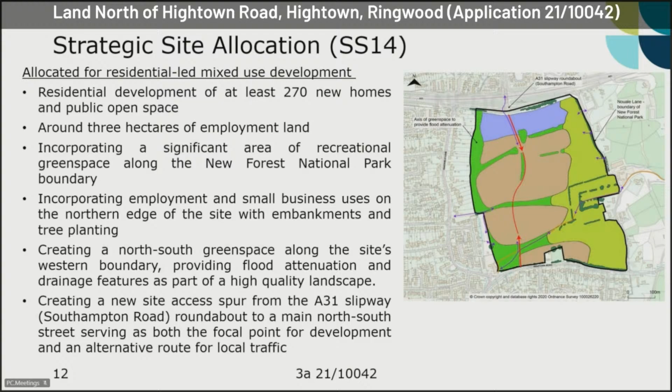So how does the application sit against that allocation? The plan on the right is the land use parameter plan, and I'll take you through the other parameter plans in a moment, but it sits on this slide quite helpfully alongside the allocation and the concept master plan. You can see the colours are broadly the same in terms of the employment being focused at the north of the site. The buff colour remains with the residential parcels, and the two shades of green pick up on the SANG on the eastern side adjacent to the national park, and the open space requirements down the western side, with the green corridors coming through the site and alongside the right-of-way down at the south as well.

The application's in outline, as I said, with just access for consideration, but it's accompanied by a suite of parameter plans which give you an idea of how the development will come forward, and certain parameters with regards to land use, where the accesses will be, movement strategy, scale of development across the site, and how it all integrates with the landscape. So we're looking to approve these parameter plans, and that will help guide future reserved matters applications and fix certain things.

Taking you through those, the first one is the land use plan. You saw that a moment ago when I had it alongside your allocation concept master plan. I'm just picking out some of the key features.

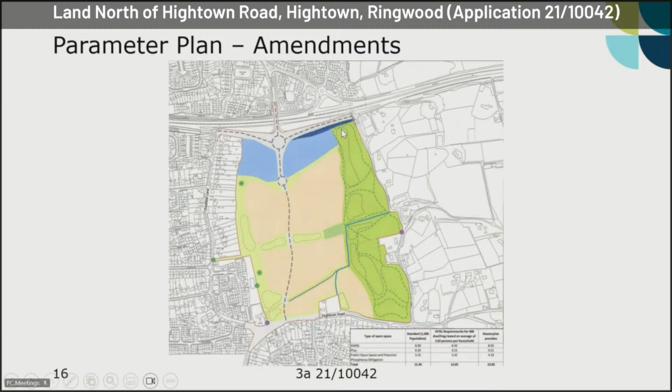Looking to the scale and building heights parameter plan, picking up on the residential parcels and the employment land. The blue is the employment land, which has buildings up to 12 metres high along the highway and at key locations - reasonably significant employment buildings, but as a gateway to the site and sitting on lower ground to the A31, there's a 6 metre difference between the A31 and down into the site at this location.

As you come into the residential parcels, the brown wash is predominantly 2-storey, up to 9.5 metres. The hatching around the central core and the spine part of the site - and I'll take you through the character areas proposed in a moment - along that central spine and corridor there are opportunities for increased height in buildings and some increase in density, which is quite important in terms of presentation to the road and placemaking, going up to 12 metres at key locations along that spine road.

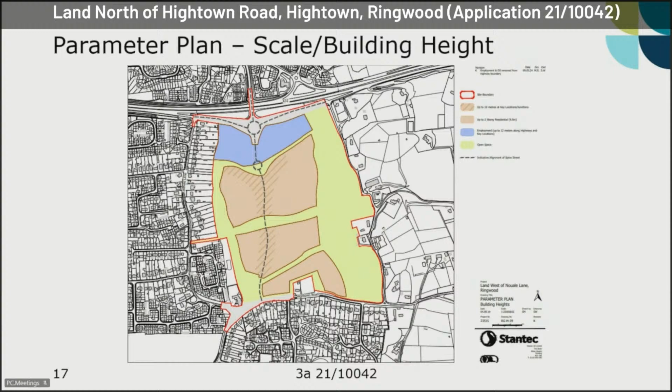The landscape parameter plan fixes those areas of green open space. Importantly, the SANG picks up on the relationship between the site and the national park. This is also on the higher part of the site - land rises gradually to the east, so having open space on the eastern side, closest to the national park, helps provide a buffer to its setting and also provides the required environmental mitigation. That has green corridors and wedges linking through to the other open space.

It's a requirement of your policy, as seen in the local plan, for open space to be provided on the western side of the site to provide separation and a buffer opportunity for existing residents in Ringwood. Along the south, there's an opportunity to enhance the existing right-of-way and provide another green corridor, with a slightly more narrow corridor of green planting and buffer around the existing Oak Cottage at the southern part of the site.

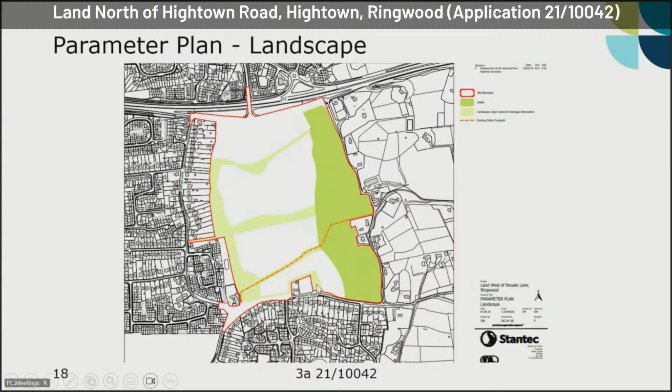Moving to access and movement in the parameter plan, you'll have seen from the report there are two principal accesses into the site. The first is at the southern part of the site off Hightown Road, a simple priority T-junction coming into the site at the south, forming part of the key spine road running north to south up towards the A31.

When you get to the A31, it's proposed to adjust and amend the roundabout to provide a fourth arm into the site, including dropping down into the site, as well as improvements to the roundabout with improved pedestrian crossing facilities and connectivity to the north.

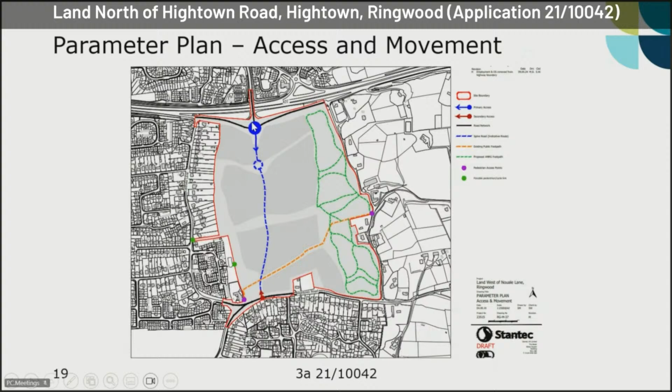Thinking about that access plan and strategy, the two main access points are shown in the circles here: the big circle is the main piece of infrastructure, the A31 access roundabout, the straight line indicatively shows the spine road running through the site, and then the new access onto Hightown Road, the simple priority junction in the south. There were two other pieces of significant off-site infrastructure works included.

One is an adjustment to the Crow Lane Hightown Road junction, which is circled here. You can see that's also within the application site red edge, so it's part of the access provisions to deliver the Hightown Road access down here.

And then further away, up at Southampton Road and its junction with the eastbound A31 on-slip, there are proposed junction improvements here.

You would have read in your Appendix A, the report from March 2023, that there were two other junctions, shown in red here, identified in the transport statement as having some capacity issues when the site comes forward.

Both are already going to struggle with background growth, and if you add the site on without these junctions there are some capacity issues. But what the transport modelling says, and what the Highway Authority have agreed to, is that by providing the north-south spine road and the two junctions as an alternative to Eastfield Lane, the delivery of this infrastructure will actually help ease the pressure and capacity problems at these two junctions.

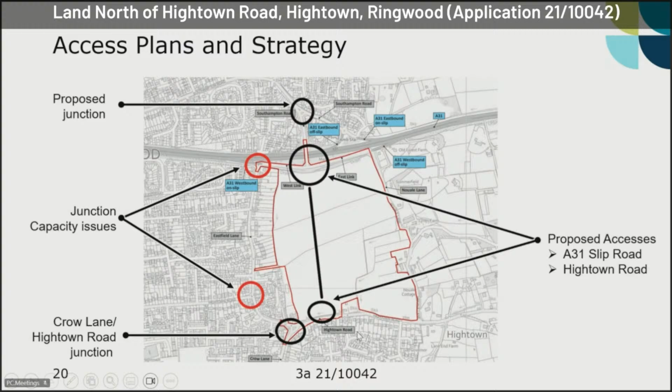Sitting at the top of the site, the northern part, and looking at the A31 access, I mentioned this is providing a new fourth arm coming south off the existing roundabout into the site with improved pedestrian crossing facilities. So you've got the A31 running east to west here, and the existing off-slip raises up.

And as I mentioned, and it's in the report, there's a 6-metre difference between the road here and down into the application site. You can see some of that planting on the verge and the embankment, which is part of the land under National Highways control.

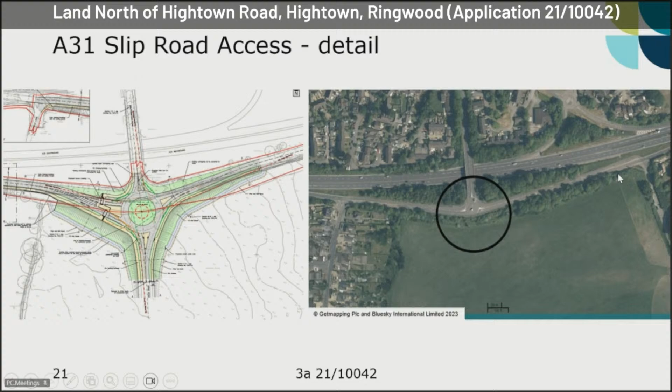Moving in and looking at the application access to the north, the proposed new southern arm off the roundabout, you'll see here there's also, in the buff colour, a 3-metre wide footpath on the south-eastern side coming up towards the off-slip to the A31, with an uncontrolled crossing facility on this side to an island, and then again an uncontrolled crossing across to a 3-metre wide shared pedestrian cycle path on the north side.

If you're coming out of the application site on the west side, there's another 3-metre cycle path along the A31 slip, but this time an improved pedestrian crossing - a controlled toucan crossing on this side, giving a controlled means of getting across to the north side of the A31.

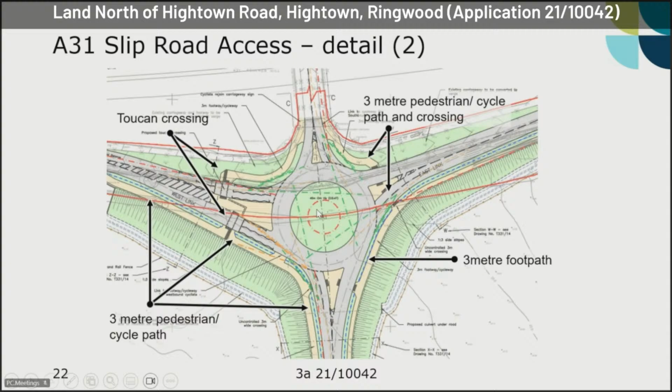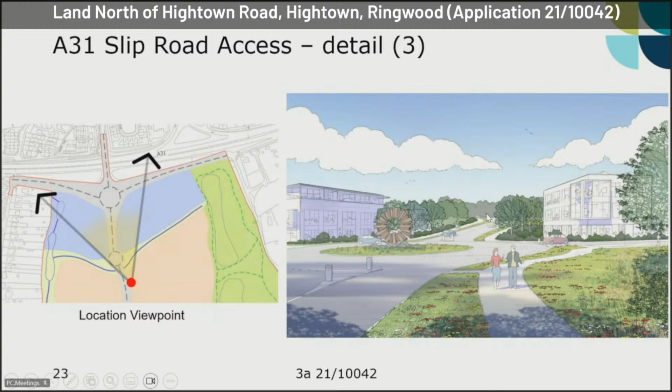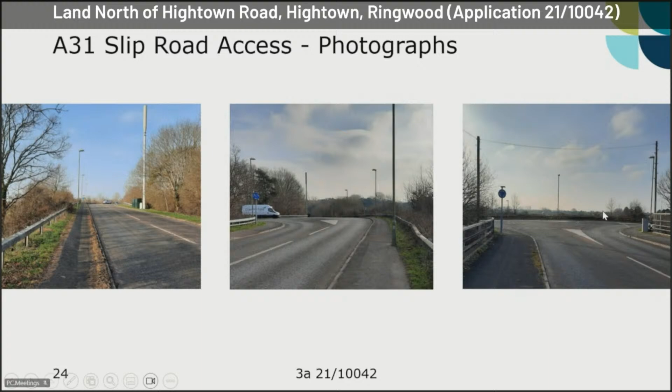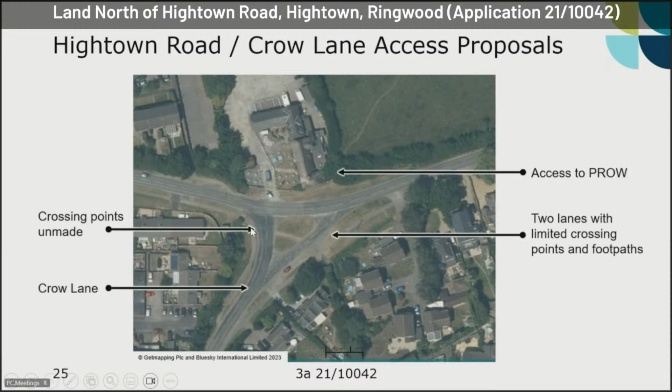There's also access to the footpath in the bottom corner, southwestern corner of the application site. You can see the desire line and the path route, with a stile just next to the pub in this location. There's limited footpath facilities along this particular part of Hightown Road, though there are paths as you head back towards the west and on the Crow Lane side.

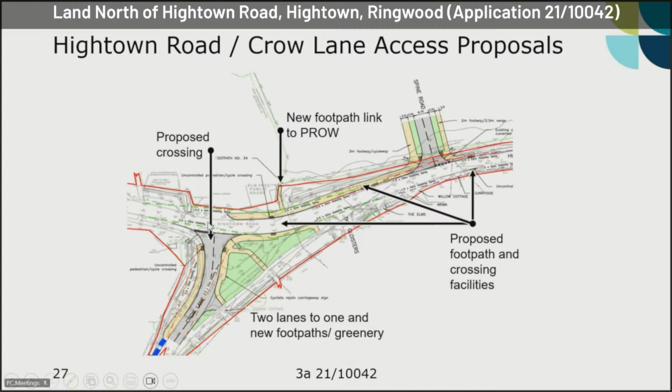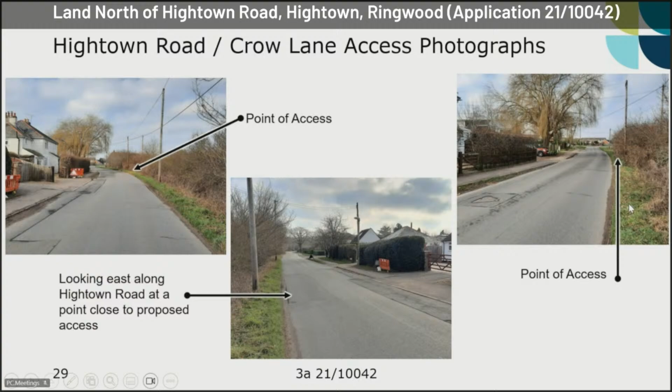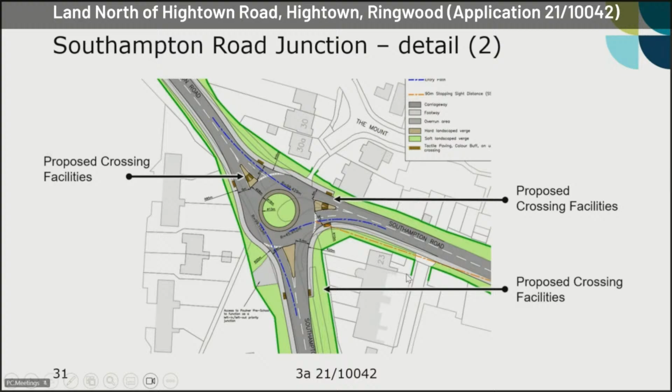This is looking at that arrangement. You've got the footpath on the western side of Southampton Road, which is very difficult to cross at the moment, and the traffic arrangement with traffic turning right to get onto the A31 in this location. With those limited crossing facilities, there's an opportunity to enhance the pedestrian and cycle provision and infrastructure as a result of changing this arrangement, as well as building in capacity.

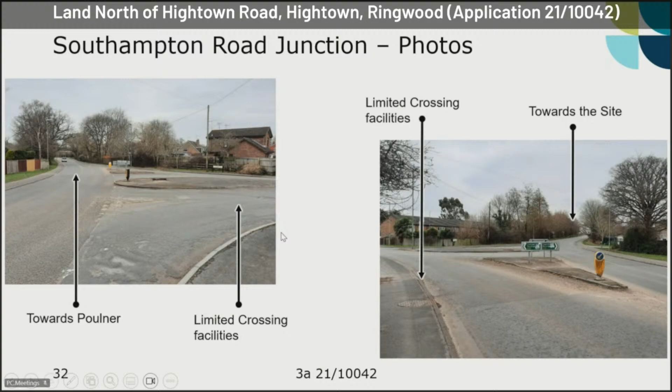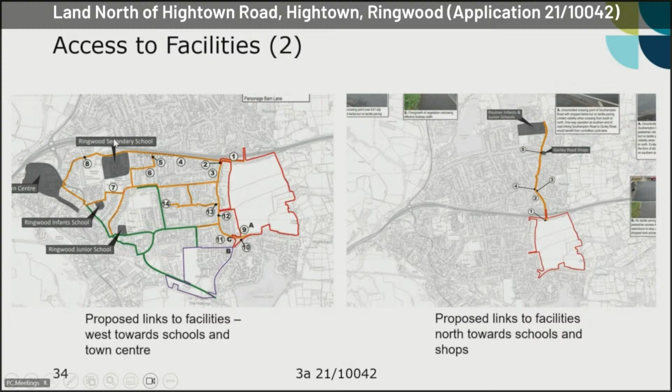You would have read in Appendix A to the report back from March 2023 that there's a number of off-site pedestrian and cycle improvements to try and facilitate that connectivity to the town centre and other amenities, to encourage people to use modes other than the car. So there's a number of pedestrian crossings to be improved, with drop kerbs to be provided, tactile paving and ramps at various locations.

There's potentially a link into Ash Grove on the right-hand side using the park, and you'll see in a moment when we look at the western open space that there's an opportunity to tie two open spaces together and create a space in this location. One of the bus stops along Eastfield Lane is proposed to be relocated to provide that and link in with that connectivity.

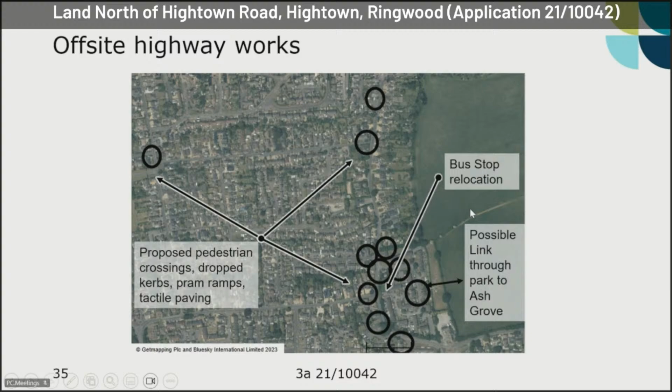The Southampton Road change to a roundabout is the junction detail I just showed you a couple of slides ago, and there's further off-site works to the north to create better pedestrian and cycle crossing facilities.

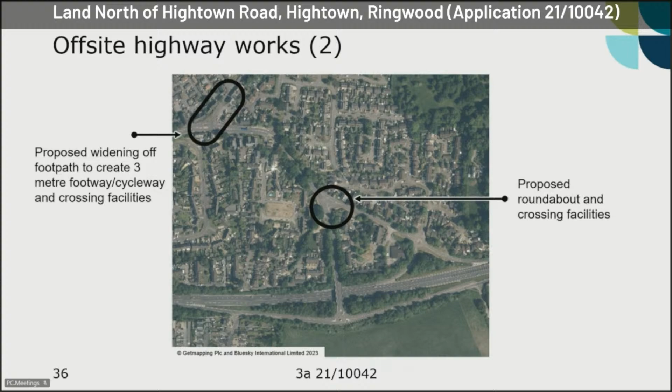The Ringo service was initially intended to be improved and extended to account for early and later hours in the day, and also to provide a Sunday service. The bus operator has made it clear that's not a service they're actually able to deliver at this point in time. They do have aspirations to divert a service through the site when the spine road's in, so that's positive, and the route is sustainable and can be delivered.

But in the absence of being able to deliver that early Ringo improvement for early hours, similar to the approach taken on Moortown Lane SS13, and tying in with that strategy, the County Council as Highway Authority are accepting of a taxi share service for those earlier times of the day and also at the weekends.

So moving to character design and the location of various pieces of infrastructure on the site. Members need to be mindful that the application is made in outline, so you're only dealing with access. All other matters are reserved, but as I said when I took you through the parameter plans, there are certain things we can fix now to make sure we have an acceptable and appropriately designed scheme that comes forward.

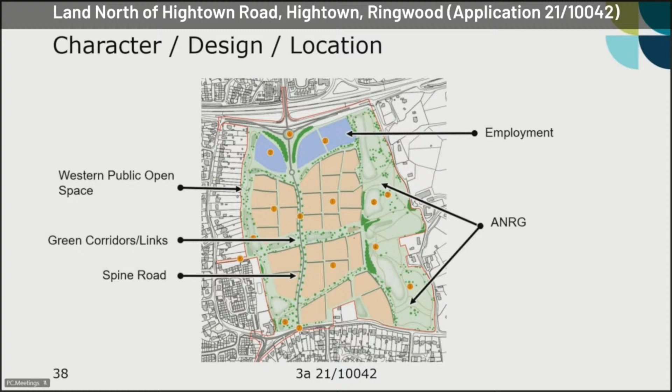The applicant has done some work looking at existing character areas when trying to define the character for the application site. Being really sensitive to the national park over on the eastern edge, we have to make sure we have development that can assimilate with the town, but also that transition from the edge of the town into the national park - that's really important.

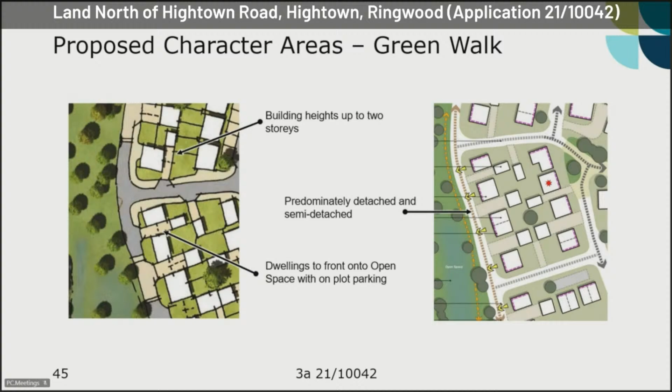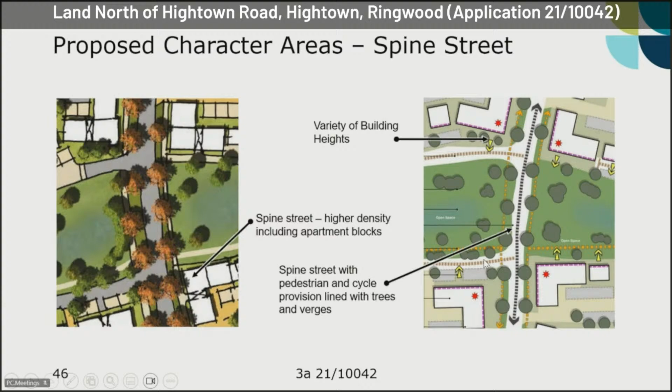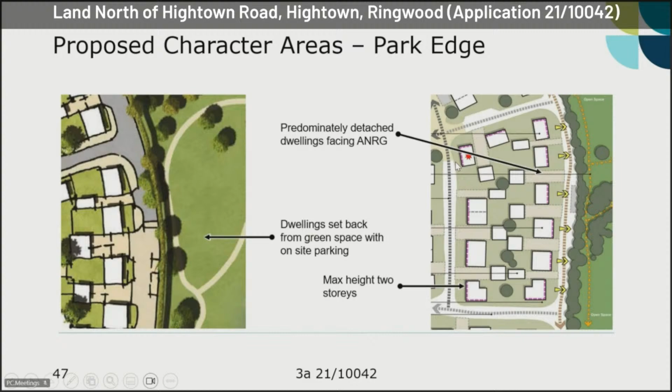The green corridors are mentioned in Appendix A to the main committee report, the March 23 committee, as really important in creating connectivity east-west through the site. We don't want green corridors that are just small, narrow strips that don't do much. The applicant has looked at how buildings will front onto those spaces, making sure we get decent separation between buildings. These corridors are a minimum of 25 metres in width, so you get a decent amount of light, connectivity and infrastructure so people can get east-west without feeling like they're walking through a narrow or uninviting corridor. That helps green the suburban environment and makes it a nice place to live.

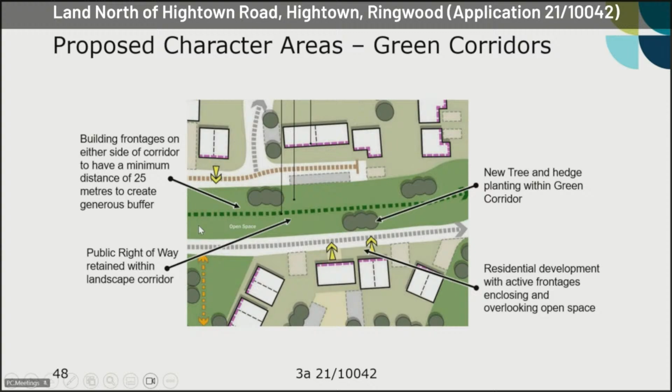Looking at the employment area to the north - I took you through the density, scale and building heights plan earlier - there's an opportunity for buildings to front onto the road and provide a gateway building. There's clearly a level change from the A31 down into the site. The building blocks here will sit alongside the road, framing views and working in courtyard arrangements, with frontages and landscaping to the edges of the road and parking and infrastructure to the rear. That's certainly the intention.

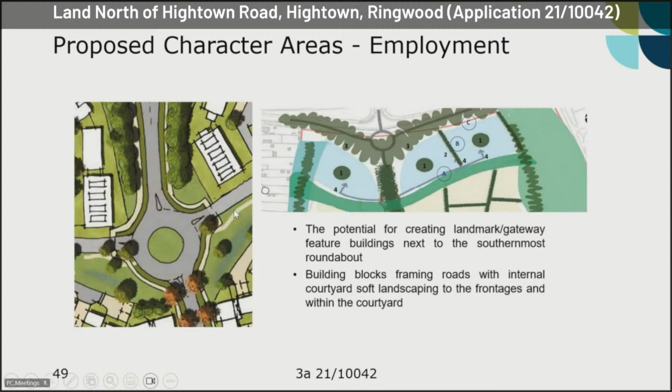Moving to flooding and surface water drainage - you'll have read in Appendix A that at the moment surface water flood water transitions across the site. The plan on the left shows the current travel of water across the site, moving from the northeast through the site down to the northwest. You can see the contours here: the higher part of the site is on the east, moving across to the lower side. The lighter blue arrows show the existing watercourses on the site in these locations.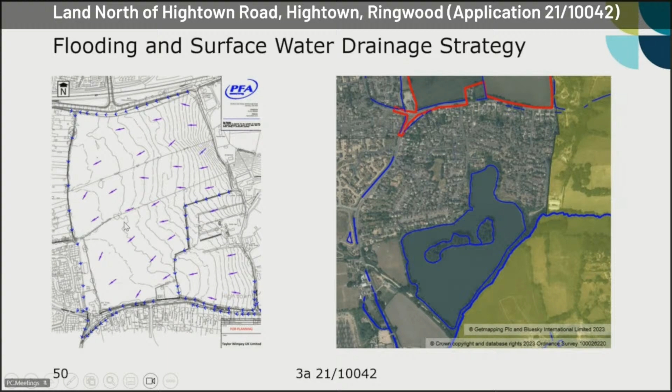The plan on the right, the red shows the southern end of the site and how everything ties together and relates to watercourses that go off-site further south. You'll have read how water at the moment transitions across the site, and the report acknowledges the site contributes to some impact of water moving off-site to the south. The yellow here is the wash of the National Park Authority, so the applicant has to think of a way to grapple with the water coming across the site, as well as mitigating the impact of development.

What the applicant's going to do - turning to page 13 of the agenda, paragraph 6.3.10, which quotes back from the main Appendix A - is propose lowering some of the banks of the on-site watercourses, combined with lowering the land on the site to create additional flood storage. Elsewhere, ground levels will be raised in areas surrounding that strategic flood mitigation to ensure there are swales and basins where floodwater can be held and its movement appropriately managed through the site.

So they'll raise the land levels where the housing is going, so the houses are in a safe location, and you'll have read that essentially they move into flood zone 1. Mitigation is provided by changing the ground levels, lowering some areas to increase capacity for storage of water elsewhere, specifically along the SANG on the eastern side of the site. This gives you an idea of the basins for flood water capture.

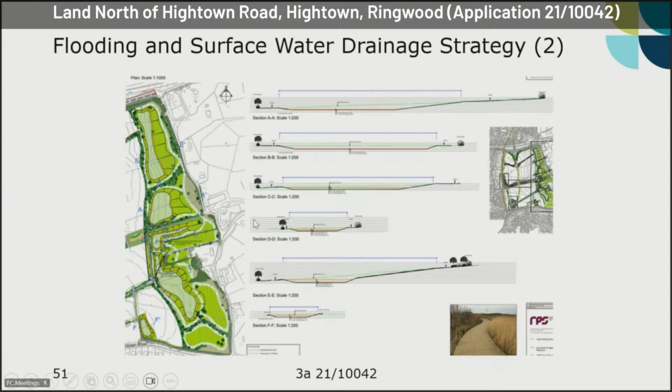The strategy here hasn't changed since March 2023. You have no objection from the Environment Agency and no objection from the County Council with their lead local flood authority role.

The cross-section detail gives you an example of where the ground level, the green dotted line being the existing ground level, is potentially going to be lowered to provide that additional storage capacity for the holding of flood water.

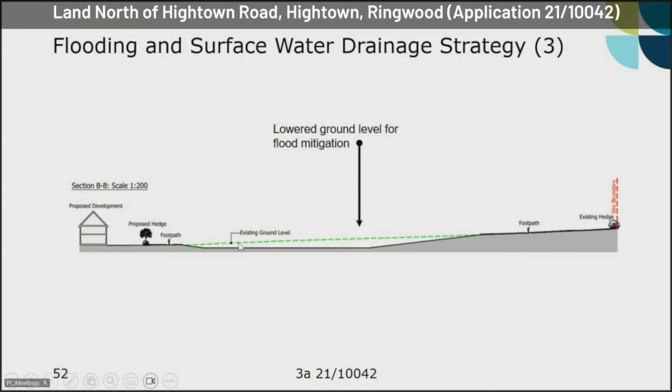And that all sits over on the eastern side of the site, with some more images coming forward. The applicant also has to grapple with not only that movement of water across the application site, but what happens when you put up to 400 homes and 3 hectares of employment land on the site. There's going to be surface water from roofs and from hard surfaces, and that needs to be managed in addition to trying to deal with the flood risk of water coming across the site.

And all that knits together with a strategy and delivery of SUDS features, Sustainable Urban Drainage System. Those features are shown on the site in a number of other landscape swales. You can see there's some use of those through the green corridors and along the western corridor as well, and that all knits together with the SANG landscape mitigation and flood strategy.

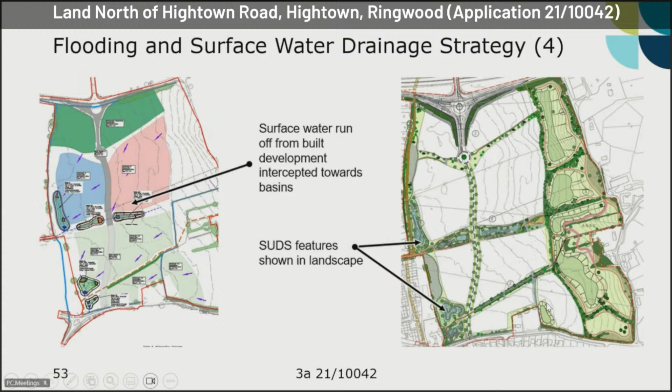I mentioned earlier that the application is an outline, yet we've pushed the applicant to give us a significant amount of detail, maybe over and above what you would get with a planning application in outline. But the flooding issue was of such significance, and remains so, that we have tried to push the applicant into giving us as much detail as we can.

You get a feel now for the size of some of these swales, how they might look in terms of their shape, how they might look in terms of some of their depth, and then also how they function. So you can see some illustrative details here.

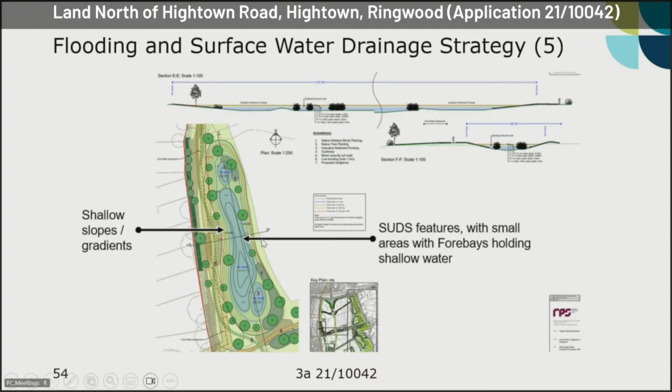This one's along the western boundary of the site, on the edge of Ringwood. And this is one of the surface water basins, and you can see how it's going to be assimilated into the landscape, controlled in terms of water being held and using hydraulic systems to make sure that the discharge into the main off-site watercourse is going to be no worse than the greenfield runoff rate, the rate without any development on site. And if anything, there is an opportunity for betterment by slowing the water down and holding it. That's set out again in your Appendix A to the report.

Taking you through some of the other examples, this is towards the southern part of the site, down by the Elm Tree Pub. This is almost at the lowest point of the site, down in the southwestern corner.

Again, further details at this stage of cross sections. The actual final detail of the arrangement of the landscape, and the arrangement of the swales and basins, is going to be secured through reserved matters, and we've got planning conditions and obligations to also ensure that the flood works are provided, delivered, managed and maintained to ensure they function as intended.

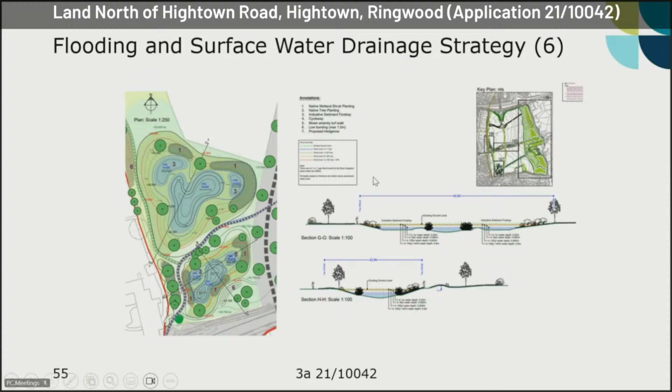On the right hand side here, you'll see there's a number of cross sections shown alphabetized as you go through the site. These are again cross sections through the various swales and SUDS basins, so you can see where the existing ground levels are, where additional flood storage capacity has been or is proposed to be created, but also maybe where some of the land has been built up relative to the edges of those swales to try and make sure that the proposed development is protected and safe for its lifetime.

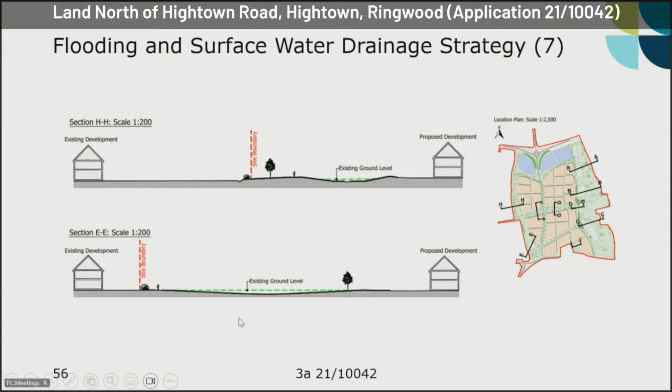Moving on to loss of features, there is going to be a loss of some of the verge on the northern side and the embankment to create the access. That's inevitable, but the 6 metre difference between the A31 down into the site means you'll get a new embankment on the road and new opportunities for new planting and new landscaping.

There is some adjustment or removal of some hedgerow on the eastern side to facilitate the flood mitigation measures and delivery of the SANG. And you saw in the photographs when I was looking at Hightown Road, there's a hedge along Hightown Road, and there's clearly going to have to be a partial removal there to facilitate the new access.

I've talked a lot about the SANG and how it is intended to function relative to its relation to the National Park and drainage, but also we need to look at how it relates and ties into the green corridors and the delivery of other infrastructure.

The SANG is an alternative natural recreational green space to try and encourage people to use those areas for leisure, recreation, walking the dog, rather than going to sensitive habitats like the forest. There's a series of circular walks and attractive routes in the SANG, which ties into the green corridors.

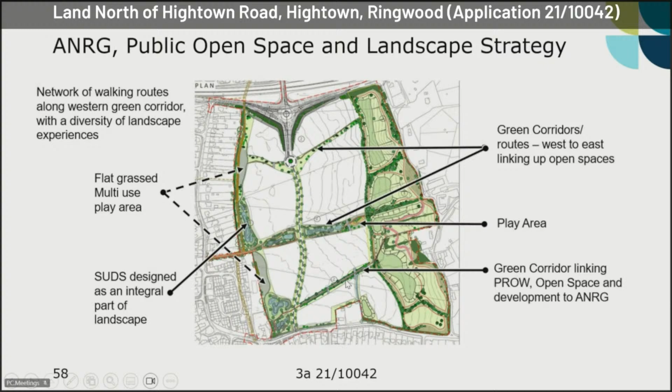I talked a minute ago about the ANRG providing circular routes, and there's different landscape treatment in terms of meadows and different grasslands, mown paths, laid paths, all trying to create an attractive space and achieve the function of the ANRG.

This is just looking back at the western open space in a little bit more detail, showing you how some of those areas relate to the edge of the town, and how they relate to the drainage and the spine road.

So again, there's that extension to the existing open space in this location. You can see it's potentially 30 metres wide and 110 metres long, so it's a significant parcel of open space in terms of a buffer to the eastern edge of the town.

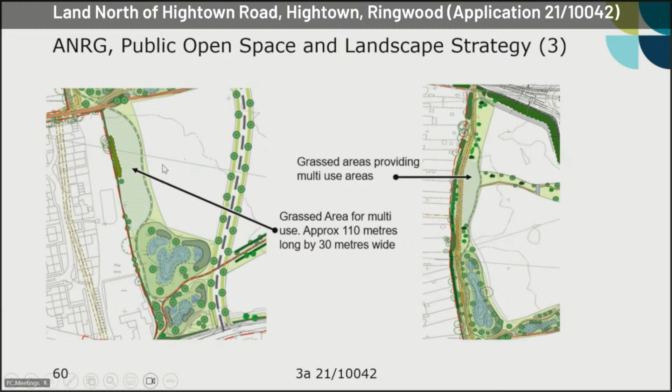Thinking about ecology, when you change open fields on the edge of the forest to a new community, there's going to be an implication. The proposed development is going to provide a BNG uplift, so there will be a net gain, and that will be a mixture of on-site and off-site.

We will look to protect trees and hedgerows where necessary across the site through the development process, but there's also an opportunity for creation of spaces and habitat through the significant open space, the SUDs, the structural planting and the ANRG, and an opportunity to incorporate biodiversity enhancement in the buildings themselves.

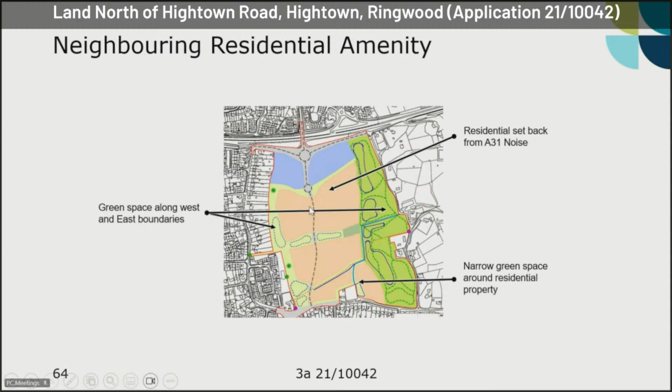I've nearly got through the slides, so thank you for your patience. Just a couple of photographs.

Chairman, you would have seen from your report, there's a requirement here in this application for members as decision maker to consider the tilted balance, paragraph 11D of the NPPF. We are in a position where our housing land supply is not a particularly good one, and this will make a significant contribution to the 5-year land supply. The site is allocated, and this provides up to 130 homes above that minimum 270 in your local plan.

It would meet the definition of sustainable development, as you see in the concluding paragraphs of the tilted balance, and it will provide 28% affordable homes. There's an opportunity for 3 hectares of employment and significant amounts of green infrastructure. Public transport is going to be improved, and I've already taken you through the fact that the Spine Road would actually help relieve some areas of capacity and congestion on nearby roads.

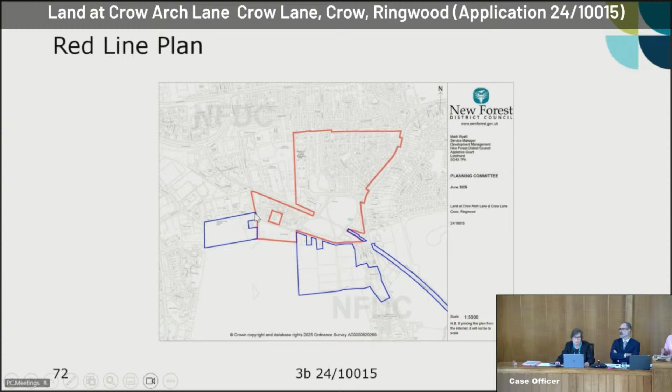This is an illustrative contextual plan. The orange line on this plan shows where the east-west link under condition 20 and 21 is proposed. This line, the green line, is the area referred to as land for dedication that would link the allotment access to Yarrow Lane. The blue arrow is an existing link to the Castleman Trail, which was delivered as part of the central plots on Ring 3, and the purple line is the Castleman Trail.

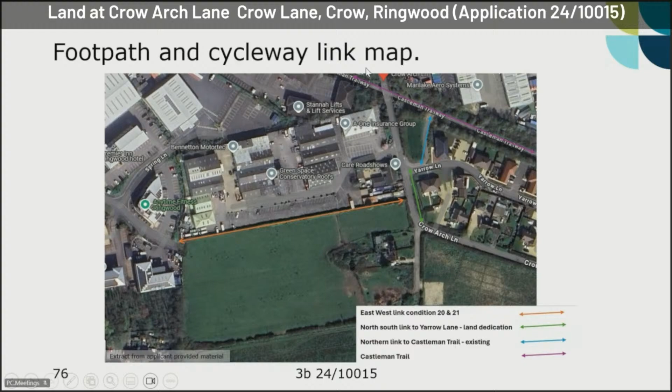In the report, one of the elements is referred to as land to be dedicated to Hampshire County Council. This is an illustrative plan that's been prepared to show where this land would be. The top part of the slide is Yarrow Lane, and this is the land to the side of the property on Yarrow Lane, linking towards the allotment access. It would also include visibility splays. The darker shaded area is the existing extent of highway ownership.

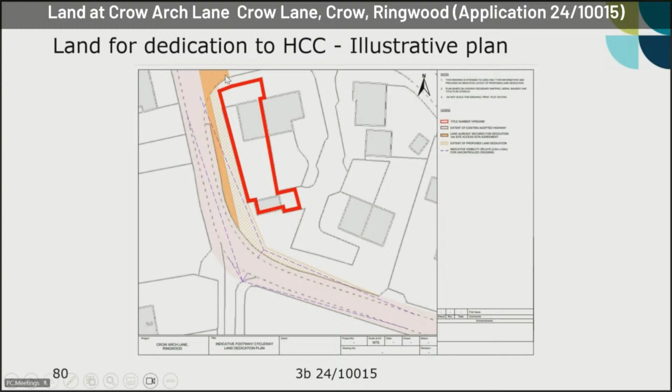So that would provide a continuous connection from that allotment access northwards.

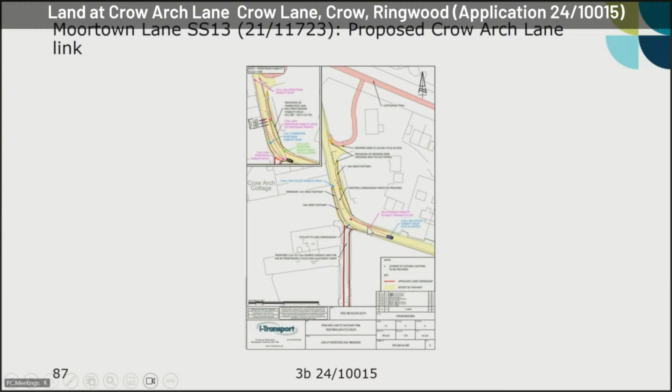As such, and as set out in more detail in the report, the recommendation is to authorise granting relief of the conditions subject to a legal agreement which would secure a contribution to be used either for the provision of the North-South link or other sustainable transport measures to improve or provide connectivity between the site and Ringwood Town Centre. This includes dedication of the land to Hampshire County Council along the eastern boundary, as identified on the plan, and construction of that link if not provided by others within 5 years of completion of the legal agreement.

That's the end of the presentation. Thank you, Chairman.

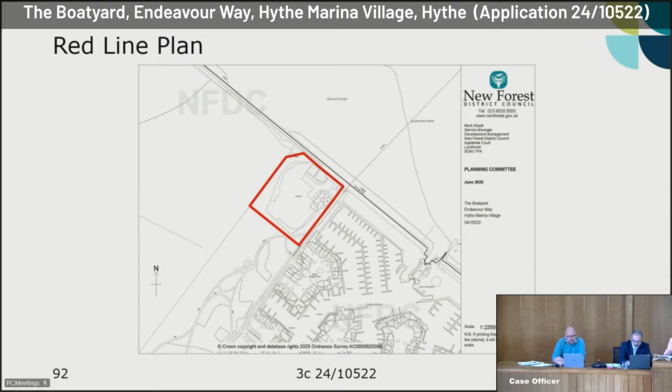So to go into the site in a bit more detail, the site we're talking about is immediately adjacent to the Hythe Marina. The Hythe Marina itself has both berthing for boats and residential properties, as well as a scattering of commercial units, but further away from the application site, with the application site forming a little more industrial commercial enclave to the northern edge.

Just to give you an idea of the relationship there with the nearest commercial properties, we've got a storage area for boats and then a number of buildings. Just while we're on this plan, I'll talk a bit about the history of the site and how we've got to where we are.

So the site has traditionally operated as a boatyard for the servicing and repair of boats. There was a condition restricting the site to the servicing and repair of boats normally berthed at the Hythe Marina itself. Back in 2009, we had a planning application which was refused by the planning committee. That application was to amend the condition to allow work on boats not based at Hythe Marina. The application was refused relating to concerns regarding comings and goings of boats and associated disruption that would cause.

That decision was appealed, and the appeal was partially allowed. So the condition was varied to allow the servicing of boats which were delivered to the marina by sea specifically, and not by road. For example, there was concern that the delivery of boats to the site by vehicle, by road, would prove disruptive to the amenity of local residents, particularly citing concerns about balconies and amenity spaces fronting Endeavour Way, which is this road here.

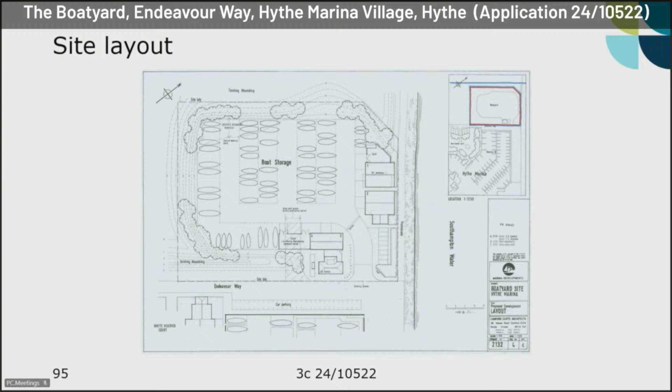And can you go to 95, please? So when we look at a finished site, we're obviously looking at a much safer site which obfuscates one of the concerns people have around access. There's much better access to all the facilities, and all the boats are marked in bays, whereas if you look back on 94, the boats have actually been stacked in front of one another, which safety-wise is an issue as far as I'm concerned. So there's a much better site improvement, safety-wise.

But on the streets themselves, if we take big loads onto those sites, there is a rule that you have to have a banksman to see you in and out. So there's no way that there'd be a risk to children in the event that something heavy comes through there. So I don't think there's an issue on that.

Thank you. Councillor Wade was first, but we'll take beauty before age on this regard.

I come from obviously Lymington and Pennington. We have similar issues with boats going through narrow country roads, and even in the built-up areas, we have difficulties with boats going down narrow urban streets. I do have a lot of sympathy for the people in these roads, because these are big lumbering beasts at the end of the day, and it will cause a quite significant impact on the local community.

I do wonder whether trying to push them towards the sea, not literally, but trying to push them towards sea access makes far more sense. And I wonder if that is something we can put into the condition, rather than having them come down the narrow roads, because there are a lot of narrow country lanes in that particular part of Hythe and Dibden.